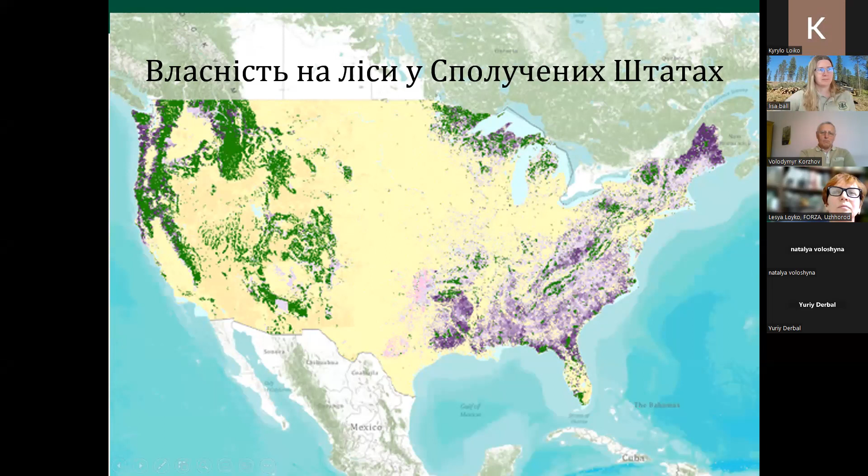So the Pacific Northwest is a temperate rainforest, getting a lot of moisture coming off the Pacific Ocean. And so there can be 150 to 400 centimeters of rain annually. It has cold, wet winters. So a lot of the rain turns to snow at the higher elevations, around 1,000 meters. So below that is rain and above that is snow, followed by warm, dry summers. It's volcanic in origin, and a lot of our mountains are still considered active volcanoes, although the last major eruption was 40 years ago. And it's mostly coniferous trees, Douglas fir, cedars, and hemlocks.

The east, because it's farther inland, is a little bit drier. Depending on where you are, ranging from 25 to 250 centimeters of rainfall, has a lot colder winters, in part because it's higher elevation, in part because it's away from the ocean. It's also volcanic in nature. It has a little bit more mixed species, pines and hardwoods.

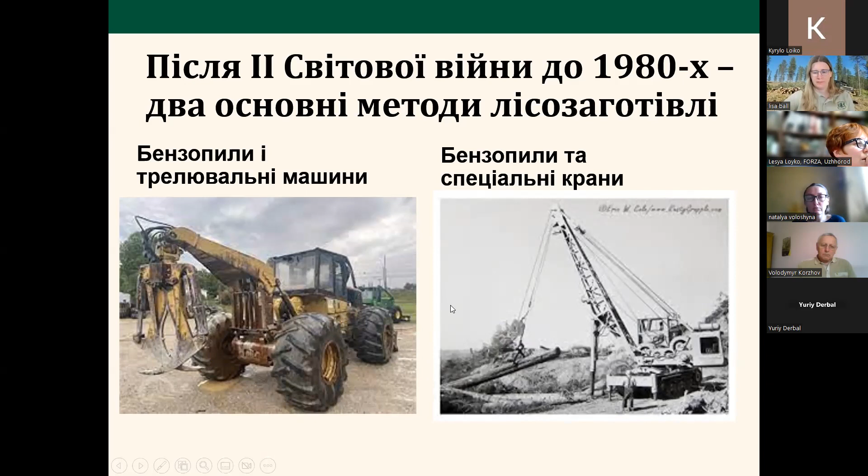In the 1980s, there was a switch to doing less and less cutting using chainsaws, and on slopes where it would allow, about under 40%, felling turned over to feller bunchers. This machine will go out and it can cut a tree, hold it, cut another tree, and they can hold up to 10 trees while still collecting and cutting more. So we call this a feller buncher. It then places bunches of trees that makes skidding very efficient.

So it's more efficient, and it's also a lot safer. Logging, at least in the US, is always the number 1 or number 2 most dangerous job, and cutting trees with chainsaws is definitely one of the more hazardous jobs. Being able to put the worker inside of the machine versus cutting with a chainsaw improves worker safety significantly, as well as increasing productivity and reducing costs.

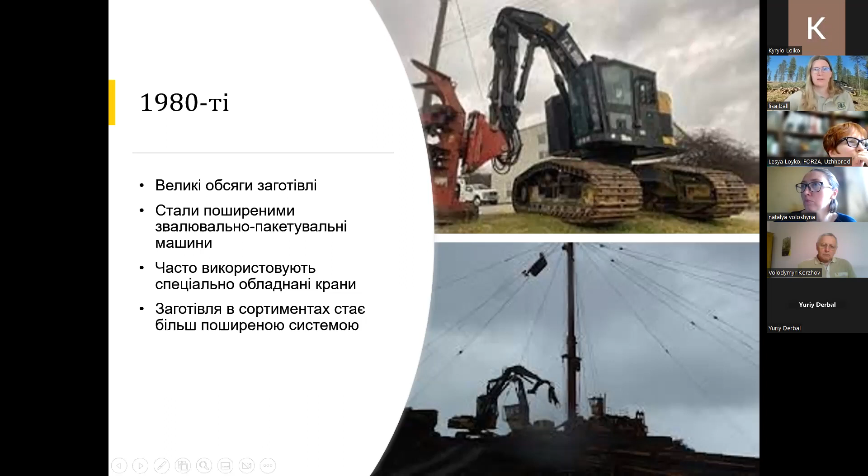And then we come into the 90s. Up through the 80s, a lot of the harvest was still old growth. But in the 90s, there was a big public pushback, and a lot of concerns were raised about logging practices, especially around the cutting of old growth and what that means for wildlife that depends on the old growth forests, fish, and the whole ecosystem of that old growth forest.

So a lot of new regulations came into effect, and you see there was a significant drop in our harvest volumes between 1990 and 2000, where it has basically plateaued since then. Because volumes dropped so much and we shifted away from high value old growth to younger stands, the loggers needed to really be as efficient as possible in their logging in order to stay in business.

And so harvests stopped in areas, especially in the east, with low rainfall and slow tree growth. Those areas stopped being harvested because it was too costly to get to them. And so yarders with the tower system went away in a lot of areas, because the trees weren't economical enough to justify that logging system. And now in those areas, there are no yarders left.

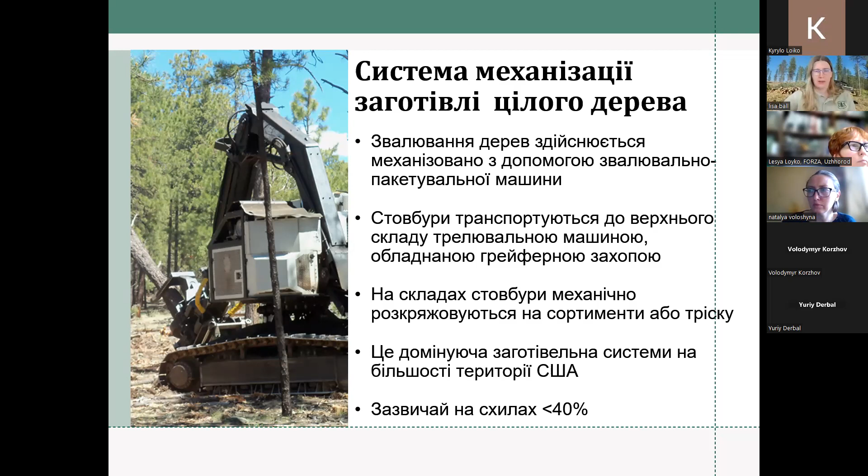With this system, all the tops and limbs are left at the landing, which has its good and bad. If you are worried about wildfire, you don't want that slash out in the woods causing wildfire concerns. But it also means you have a large pile of slash at the landing that you need to manage. And it does remove some of those nutrients from the soils.

The mechanical whole tree system is very cost efficient. It's also very safe because your loggers are in equipment cabs the whole time. You have a person in the feller buncher and one in the skidder, and there are a lot of regulations that go into how those cabs are designed in terms of safety, if something falls on them or if they were to roll over. As I mentioned, all of the slash ends up at the road.

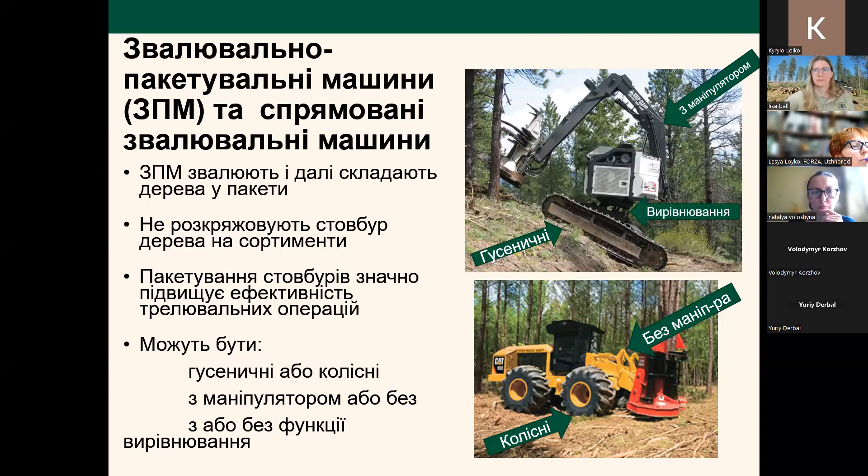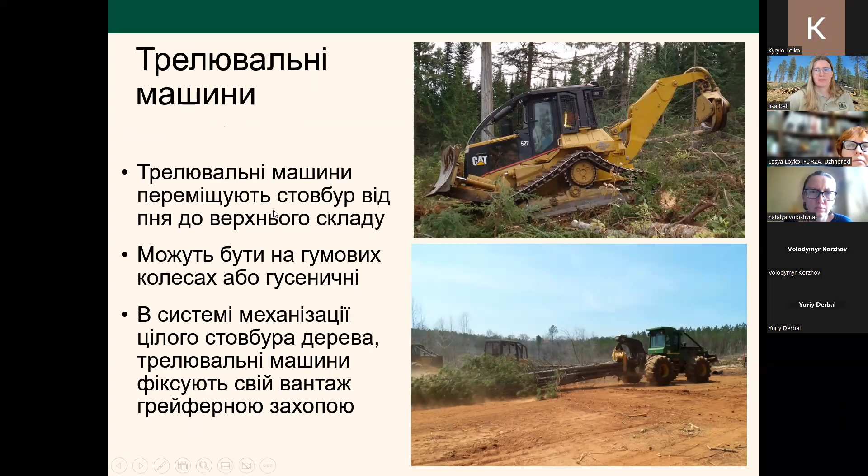So the mechanical whole tree system is probably the cheapest logging system that we have, and it's the most common, in part for that reason. But there are also cut-to-length systems out there.

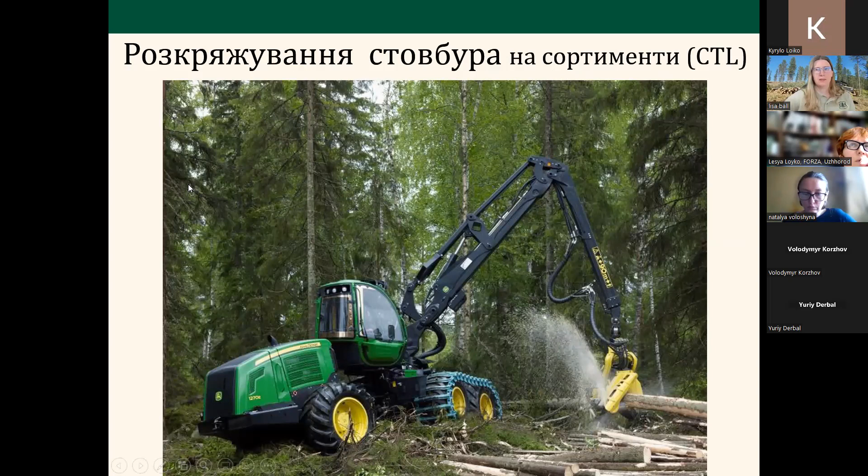When it does that, it creates slash. This slash is good because the harvester will walk on that slash. This reduces the soil impacts, specifically soil compaction and runoff after operations have concluded. The forwarder will then go and grab these logs and carry them back to the road, to the landing.

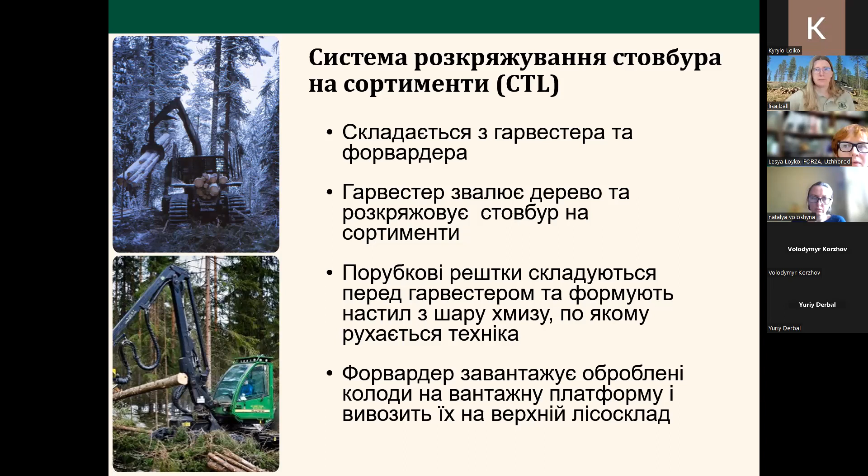That slash mat that the harvester creates reduces soil compaction, especially in wet soils. It causes very little residual stand damage, so it doesn't hurt the trees that are left, and it works very well when you have a lot of trees left.

This is a stand after the harvester has gone through, and there's still a lot of trees left in the stand that needed to be protected.

Harvesters can also be tracked or wheeled. As I mentioned, it cuts the trees and delimbs them. These can generally go up to 40 or 50% slope, although some newer models are specifically designed to go up to 75% with a winched tether, as we'll talk about later. You get fully processed and sorted logs out in the woods to take to the landing.

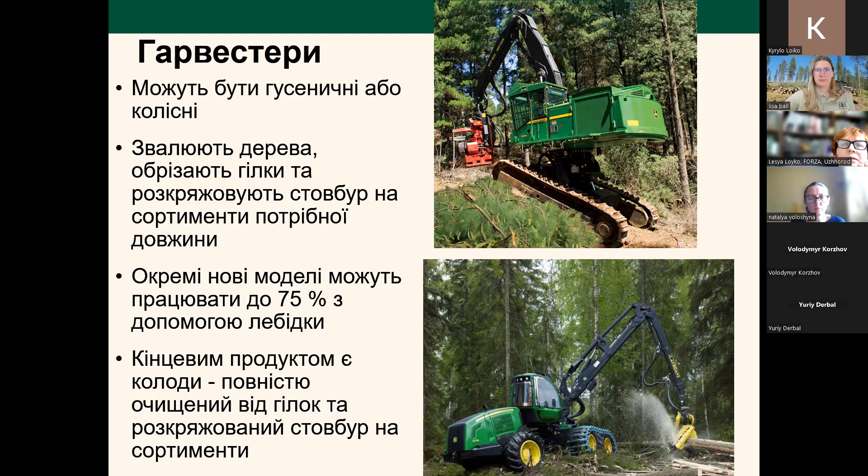Here's an example of one of the machines working on some steep ground near where I live.

The forwarder carries logs free and clear of the ground. They're not dragged like you see with a skidder. The machine has its own grapple and will load itself with the logs.

It does only handle shorter logs, so 5 to 8 meter long logs, compared to the skidder, which is bringing out full trees that might be 30 meters or more in length.

But they do stay on that same slash mat created by the harvester, which again reduces soil impacts. And because you have logs, not trees, cut at the road, they don't require much of a landing at all. They can just drive up and place the logs next to the road to be hauled away.

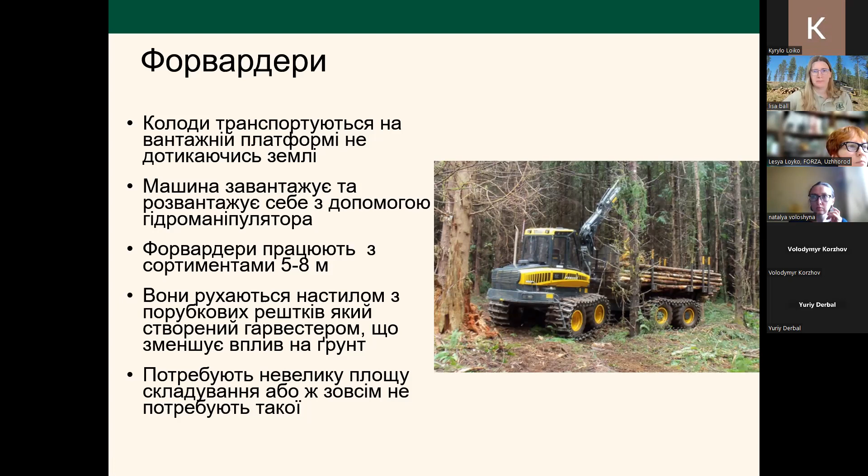So when we're designing a cut to length system, one of the main things is these machines, especially the forwarders, do not go on a side very well. They will tend to roll, so they need to go straight up and down the hill.

These forwarders can also carry a lot more than your skidders, and so we make fewer passes going back and forth, which also helps to reduce soil impacts.

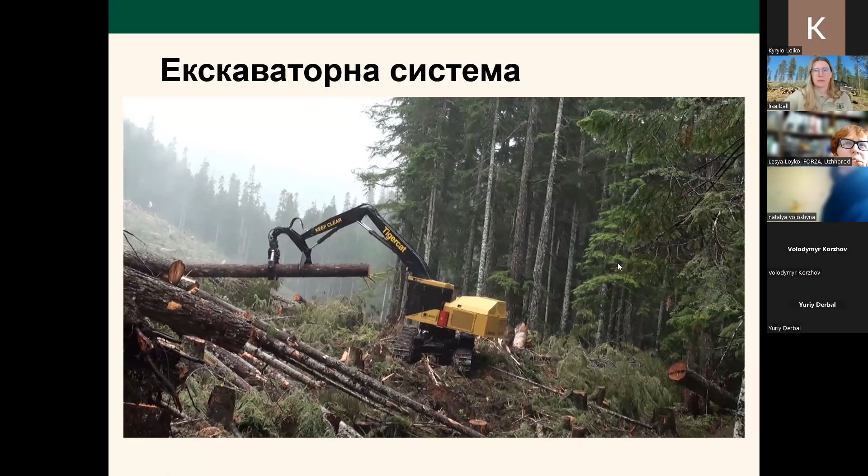The last ground-based system I'm going to talk about is what we call the shovel system. In this system, the tree has been cut and the machine picks up a log and moves it closer to the road. It does that for all the logs it can reach. It moves forward a little bit and does the same thing, just picking up logs and placing them closer to the landing. They'll do that several times until they reach the road.

Sometimes they have a saw in this head, so they can both cut the tree and also move it closer to the road for operations.

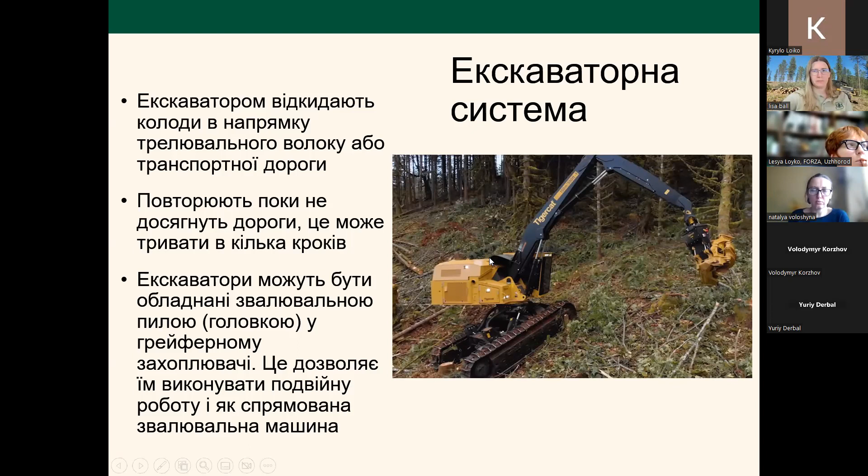This system is often used when you have wet sites, because you really don't want a machine going back and forth. It's only making one pass, moving very slowly and lifting the logs, which causes probably the least amount of soil disturbance.

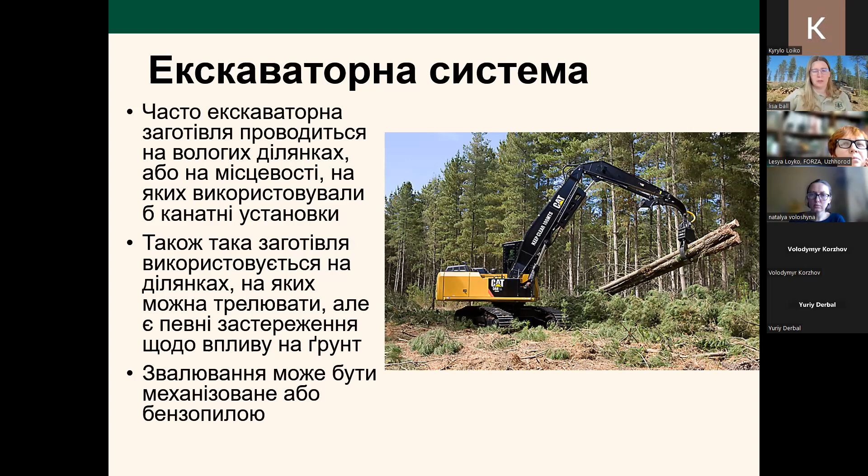It also works well for relatively short distances. If you have a road and a stream and 100 to 150 meters you want to treat on some steeper slopes, it's a good system for that. The soil impacts are reduced because the machine only makes that one pass, about every 15 meters.

It's a tool for clear cuts because, as you can see, it's picking up the logs and moving them. If you have existing trees, they tend to get hit a lot, which causes damage. It also slows down the shovel operation, so your productivity goes down.

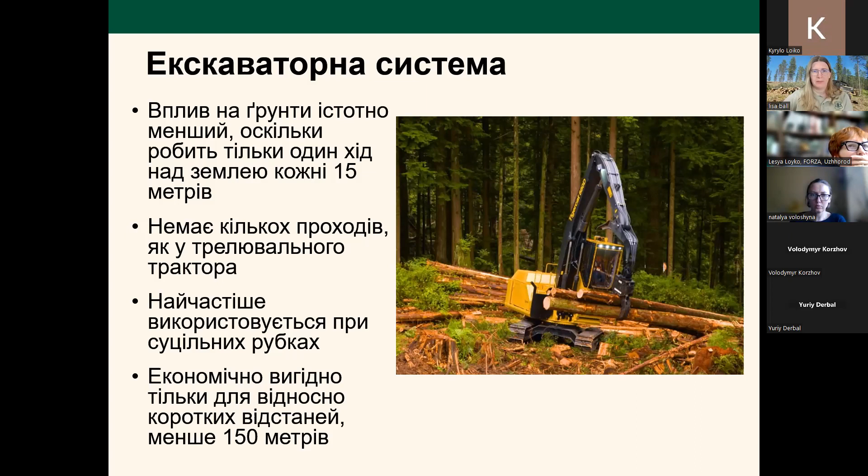It is only viable for short distances, about 150 meters. Technically you can go farther, but it's going to cost more and slow down the operation. But compared to cable yarding, it is quite cost effective, especially for those shorter distances.

Again, it is mostly a clear cut operation, although it can be used if you have a few residual trees left in your unit. This is also sometimes used in swamps, where they will go out into the swamp and move the logs over to basically a road made of trees that the skidder will operate on.

So that was what I had for ground-based systems. That's a good stopping point if anyone has any questions on that topic area.

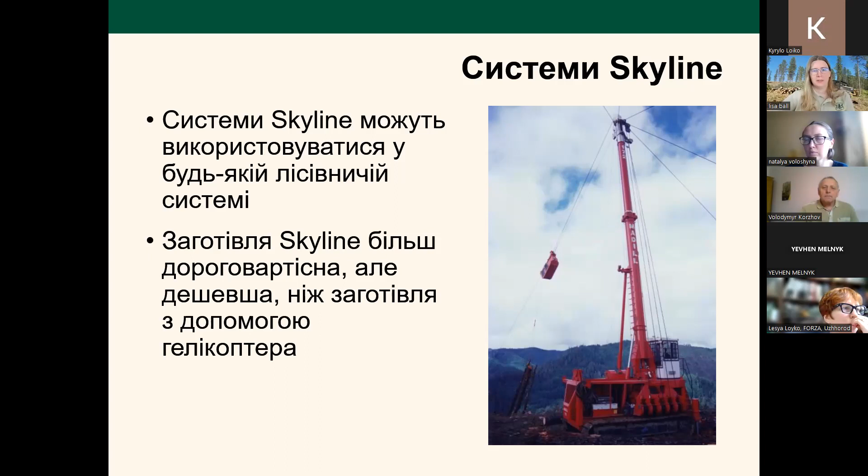And so here's a diagram. You have your yarder on the road. Most of them need to have stumps to help hold the tower up. You have lines that go out and tie off to trees out in the woods. And you have another smaller machine that goes out, will grab the logs, and then a rope is used to pull it back to the road.

The multi-span option is basically where you use a tree in the middle of the unit to keep this line up in the air so that you can reach further with this system. The topography, or how the land is shaped, really affects how far you can reach in grabbing logs.

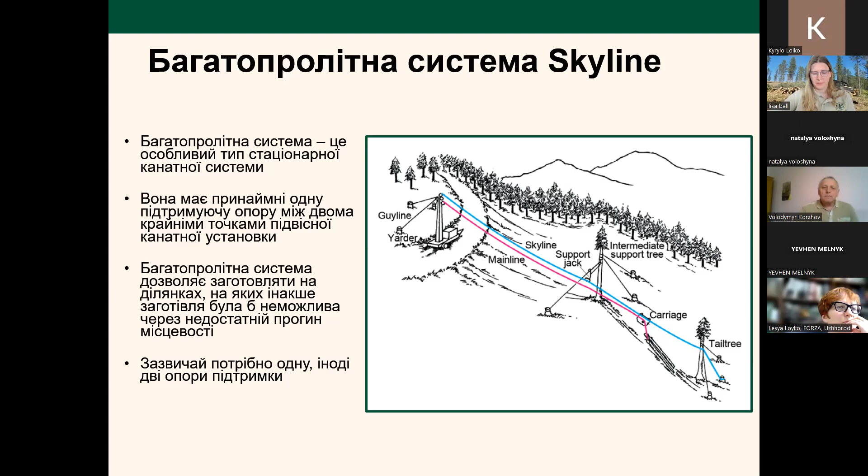So yarders is the machine that we use that sits at the landing at the road. In the past, they were purpose-built yarders. During the 80s, a lot of these were made. Sometimes they can move a little bit, which changes where they're most efficient, if they're standing or if they can rotate to pile the logs, say in the road like this. But very, very few of these are built anymore expressly just for the purpose of logging.

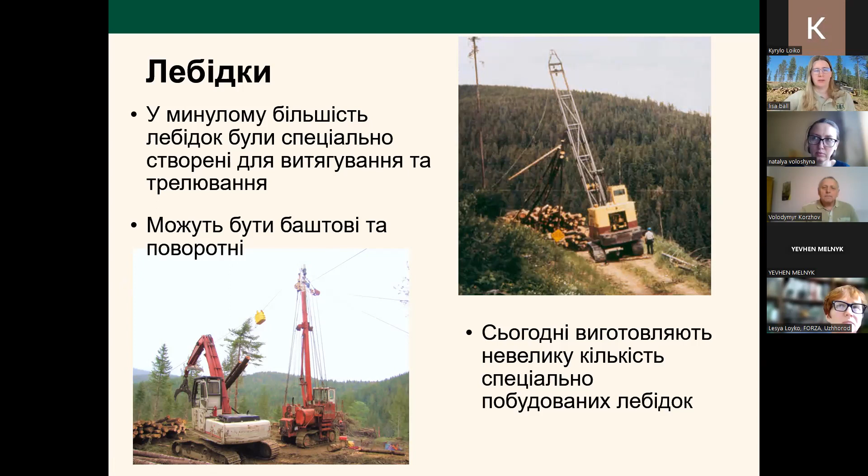Now, most of the machines we use as yarders were actually some other type of machine that loggers make modifications to so that they can act as a yarder. So we have a loader and we have an excaliner that are now yarders that started as a different piece of machine originally.

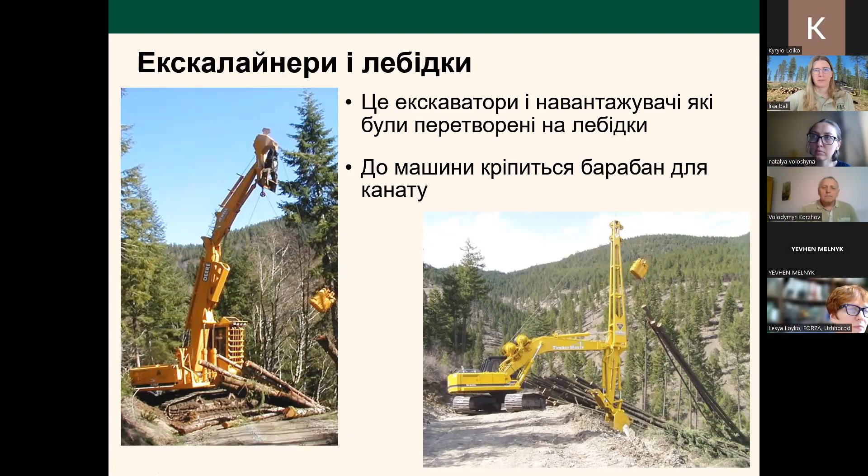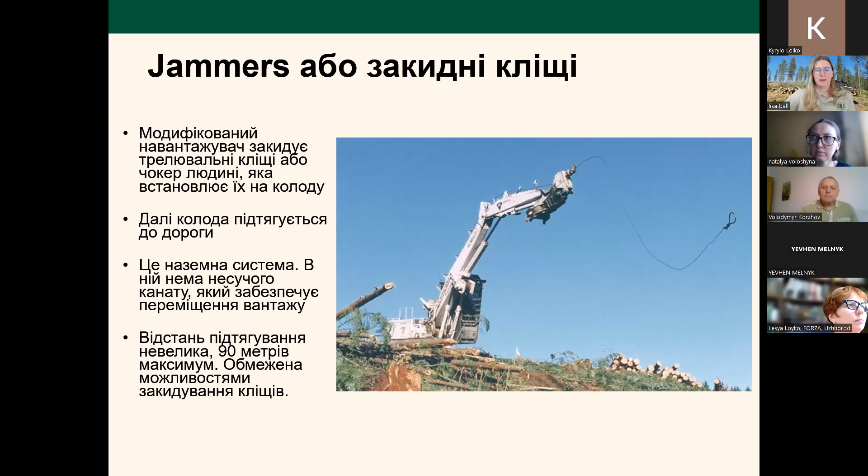Another method for getting the logs out for shorter areas of, say, about 90 meters is jammers, also known as tong throwing. And so you have the tongs here attached to a rope, and this machine will start swinging around and then release the brake, and the tongs go flying out into the woods. Someone in the woods will put those tongs around a log, and then it will be dragged back to the road.

As you see here, this will throw them out into the woods, and you have a very brave person out in the woods watching these very heavy tongs come flying towards them. They will put them on the log and then they will be dragged back. So those are our cable systems that are used in the US predominantly.

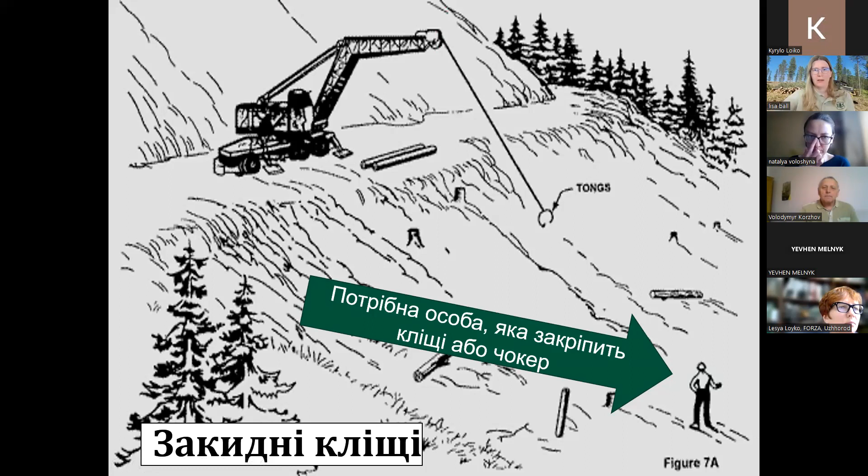Because you can't overload the helicopter or it will crash, they need to be very careful about how much weight they put on that helicopter. Flying tops and limbs is very expensive and they don't want to do that. It costs about 4 times as much as your ground-based systems and about twice as much as a cable system. These machines can cost up to $8,000 US per hour to operate, and it is a very expensive system.

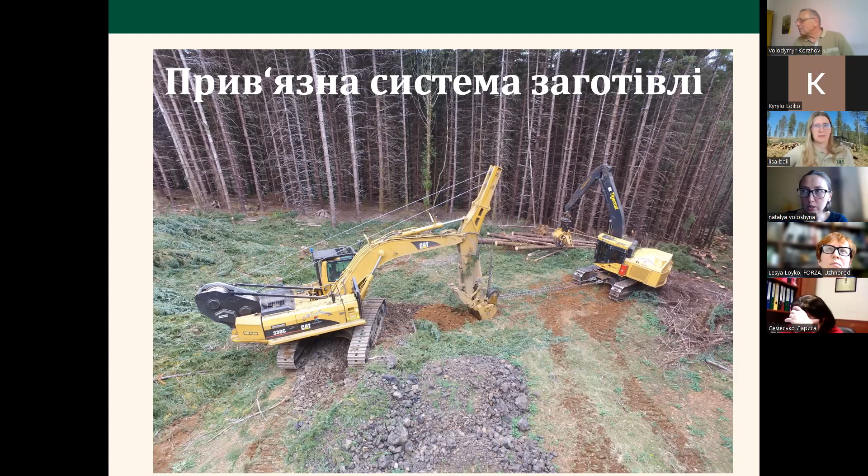Iryna Shpakivska asked this question: if there are large areas of deadfall territories, what methods are used then? And I see Volodymyr's hand. I'm not sure I understood the question. Can you repeat that? The question was, if you have large areas of windfalls, what approach, what machinery do you use? What systems do you use?

For that, if it's less than 40%, we found the cut to length system works well because the machine can pick up the logs and get the branches and pile them easily and kind of sort through them. If it's on the steeper ground, if we can reach it with a cable system, we will. You know, last resort would be helicopter.

Let me just summarize. It depends not so much on the area of this windfall, but rather on the landscape, on other conditions, right? On the slope, the tilt, and so on and so forth. Okay, thank you. We have another question.

If I may, I read this question first, Volodymyr, and this is about the part of the presentation that you presented previously and the one that goes next, I believe, because the question is, where do you train forestry machinery operators, and if they need special permits to work with these mechanisms, including cable systems? Where are they trained and if they need permits?

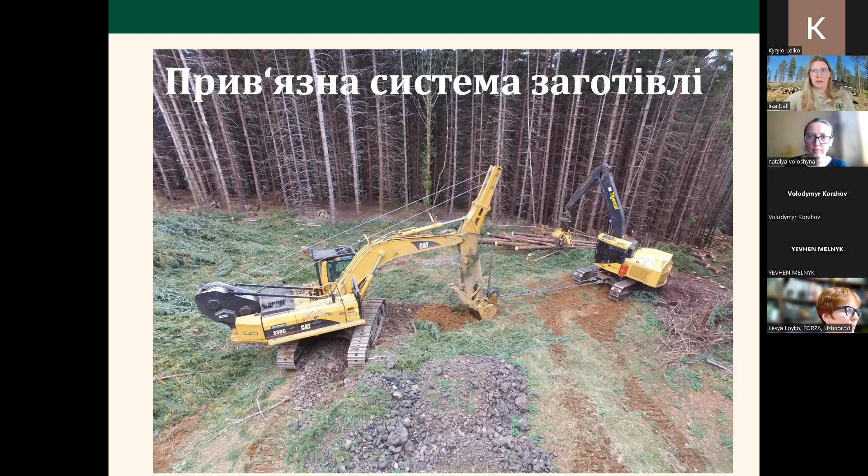And we call it tethered logging, or sometimes winch assist. Volodymyr Leonidovych, please mute your microphone. That's the request. Mute.

Okay. So with tethered logging, we're using ground-based machines that normally wouldn't go above a 40% slope onto steeper ground that would normally be cable logged. And so you have your machine and it's out operating on 70 or even 80% slopes.

Sometimes the loggers do it just for cutting the trees and still cable log, or sometimes they will fell the trees and also remove them with this tethered system. And so the harvesters, feller bunchers, directional fellers, forwarders, shovels, skidders, all of these have been used tethered in the last few years and are ongoing.

So this tethered logging, you're basically using a winch to help this machine get up and down the slope. Because it's on a steeper slope, it wouldn't be able to operate on this area, but there'll be a winch to help it get up and down this slope.

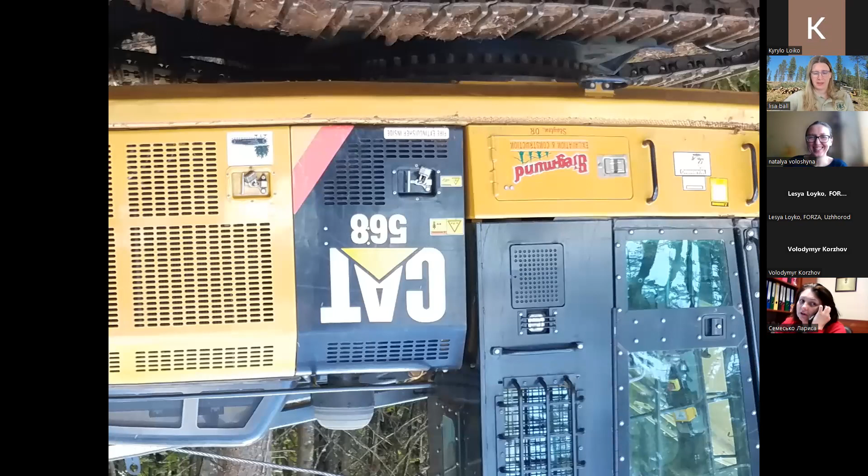You should remove one slide because it completely covers the picture with the first method. Maybe if you just delete the picture. Yeah, because that's, I guess, the picture that I had difficulties with, and I inserted it today. So maybe it covered the slide. That's okay. I'm sorry for that. No problem.

So the other method is where you have two machines. You have the winch on a machine that will stay at the road, and then you have the machine that will go out into the woods. We call this one the working machine because it's doing all the work, and we call this one the assisting machine, the one with the winch on it. Because the winch is on this machine that stays stationary, this line does move when this machine goes out into the woods.

So one of the reasons, as I mentioned, this is starting to really gain a lot of use is that it improves safety, putting them into equipment cabs that are approved by our Occupational Safety and Health Administration. Because you don't have people out cutting with chainsaws or working under the yarder, and they are instead in cabs, it is a lot safer for them.

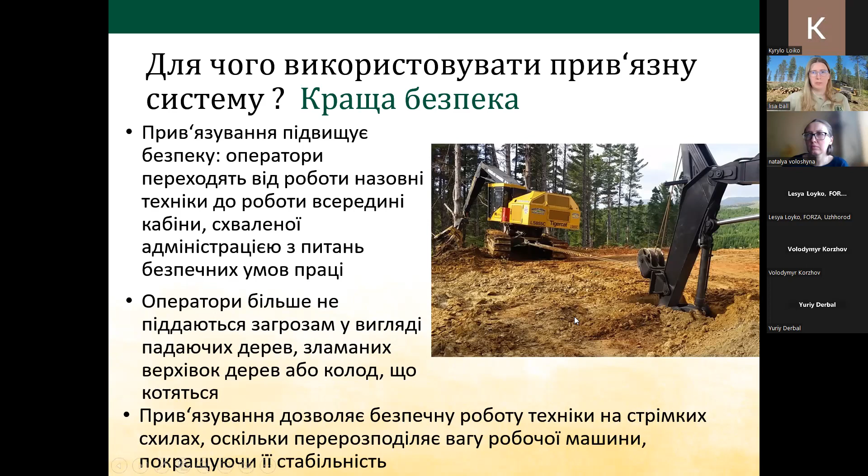And these systems have reduced soil impacts as compared to putting the same machines on a slope untethered. And so efficiency goes up because the machines are doing the work instead of someone on the ground. So you can see here, we have forwarders, shovels, even skidders can be used with this tethered system. And so it allows for fully mechanical yarding.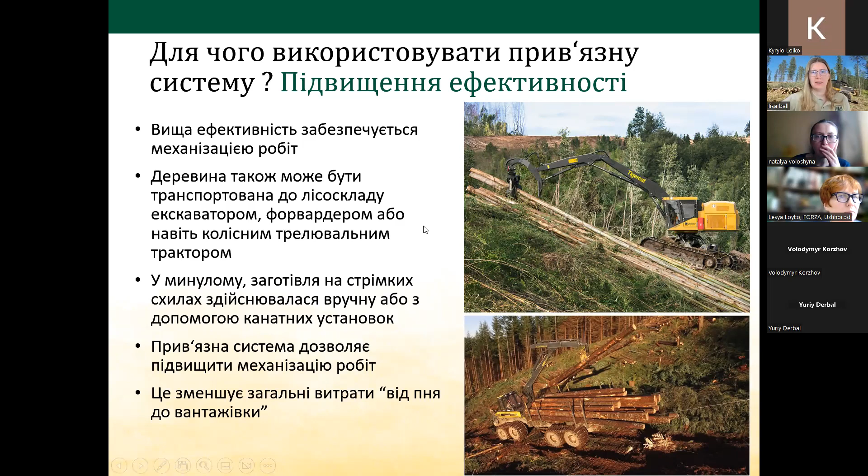So a question that people ask when they first see this tends to be, how steep can they go? How steep of a slope can you put these machines on? A better question is actually to ask, how steep should they go? This is not one of our operations. This is a picture taken somewhere in Asia, I believe. But this is steeper than we would want to see on our logging sites.

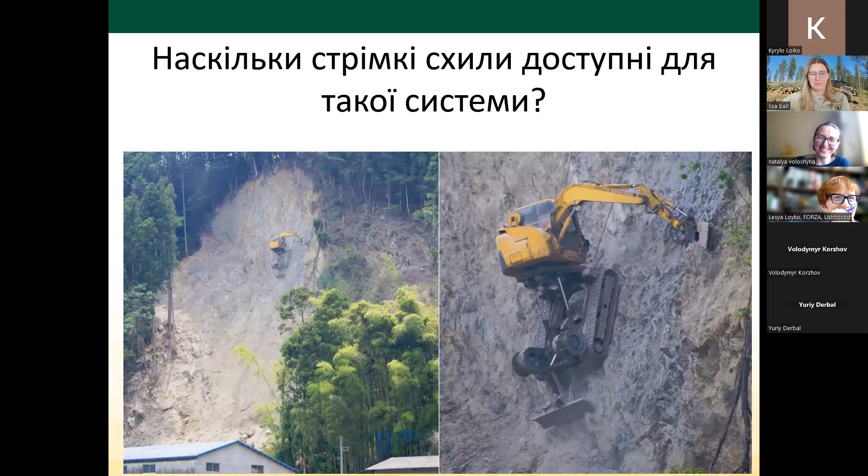And how steep they should go, a lot of that's going to depend on soil impacts. So there's slope. It's also going to depend on your soil type, the trees and bushes and plants that you have left on site, the skill of the person working the machine, the weather and ground conditions, and then the access for the machines and the anchors, such as trees, to be able to anchor these machines to.

So equipment on slopes over 40% causes concerns with soil due to displacement and rutting. That's usually caused by the machines spinning their wheels. They don't go anywhere and they can dig deeper and cause soil impacts.

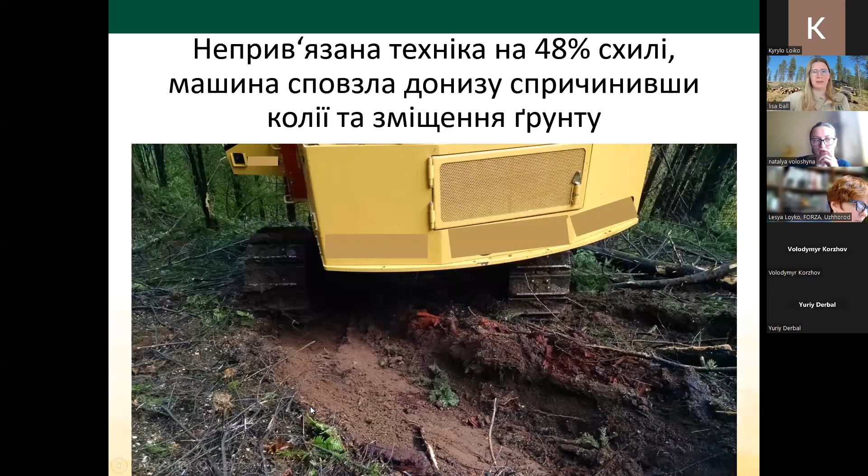So this is what happens when you go off the road with a piece of machinery that is not tethered, and it starts to slide and cause soil problems, which then become worse when you try to get back up the hill onto the road. This is why we don't take untethered equipment onto these steeper slopes, because you start getting soil impacts like this.

But when you tether, it actually changes the weight and how that happens on the equipment. If they are not tethered, all of the weight ends up focused on the downhill part of the machine, in this circumstance on the tracks. This is where that soil damage will occur, because all the weight is right here. When you add a tether in on this line, the weight is more evenly put onto the ground. It gives better traction, and you get reduced soil impacts because of that.

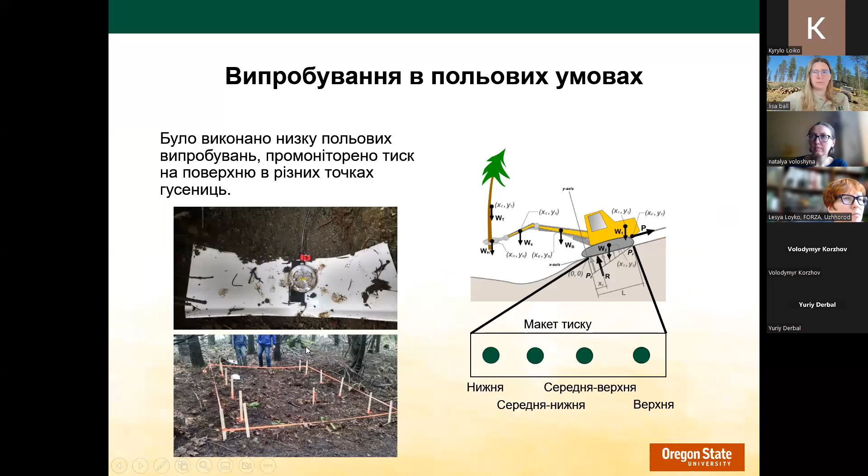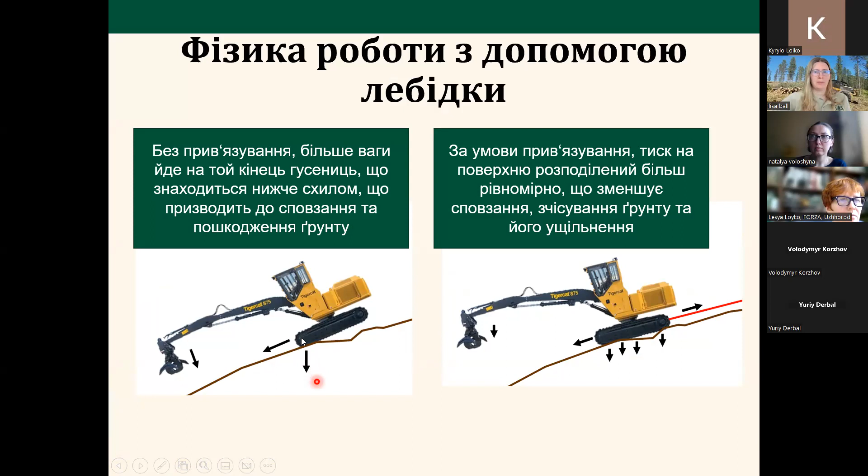When we tether, there's a little bit of increase on the top of that track, but as you can see, the weight on the bottom part of that track is greatly reduced. So instead of all the weight being here and none here, it's more evenly distributed. That allows for better traction, allows the machine to operate, causing less soil damage.

So on steep ground, more of that weight is on the downhill side, causing soil damage. When we tether, it reduces those soil impacts because the whole length of the track is in contact with the ground.

Do you have questions about the physics of how that tethering works and how it helps to reduce soil impacts?

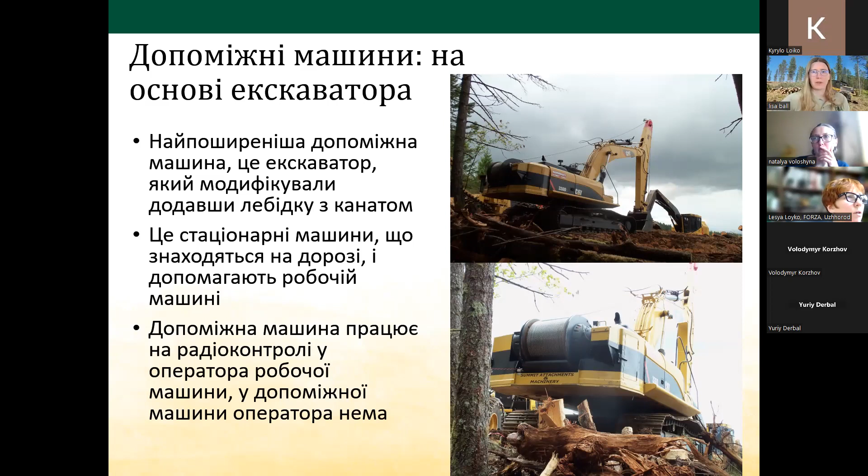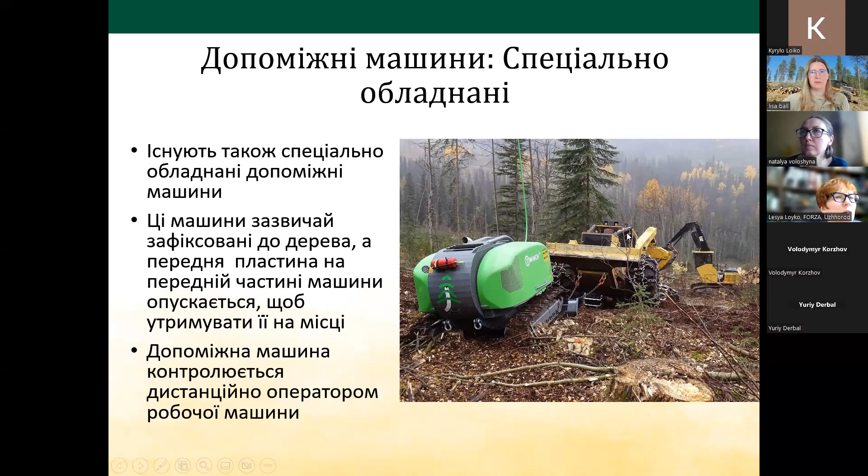The most common machine that we're seeing being used tethered is the directional feller and feller buncher. One reason is that it replaces a lot of people with chainsaws, which is one of the more dangerous jobs. It's also one of the jobs that loggers are having a harder time finding people with those skills who want to work in that job, especially because it is dangerous. This also allows for the logs to be put in piles, which, if they're cable logged, means you can cable log more effectively, or you can also then use another method, such as skidders or shovel logging. So this is the most common tethered machine we're seeing at present.

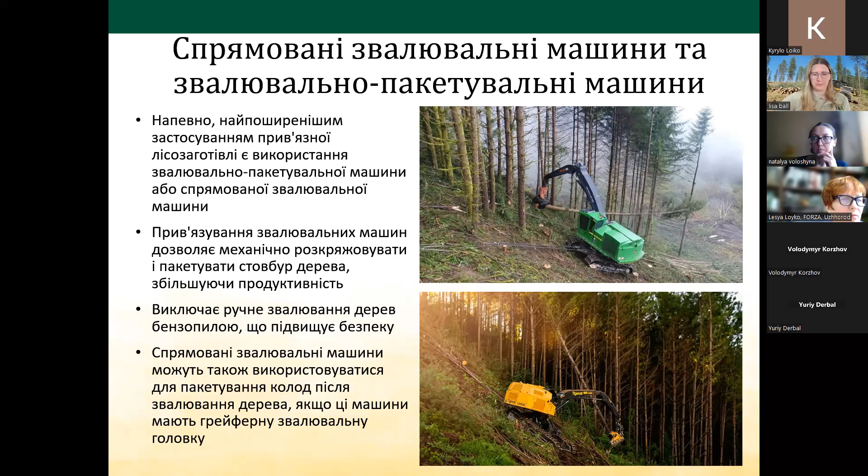And I have a video to show of a tethered directional feller for you.

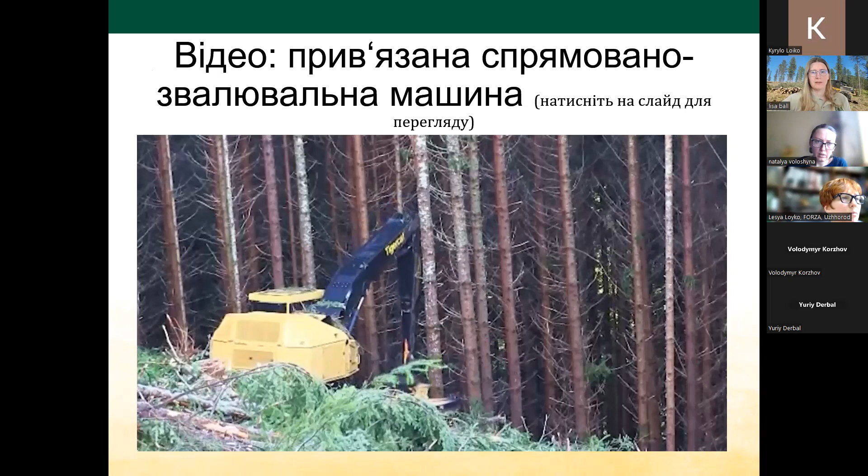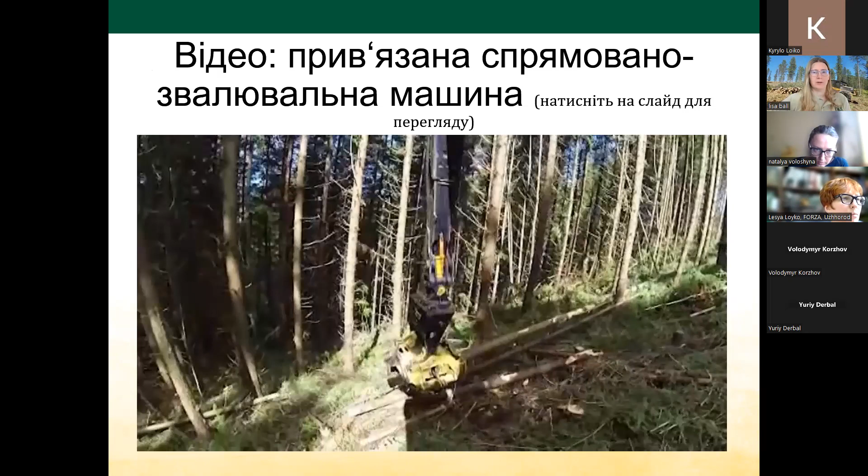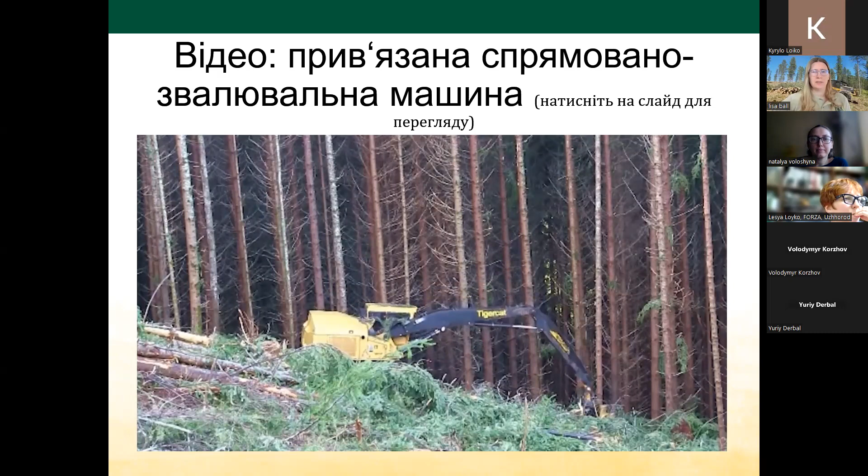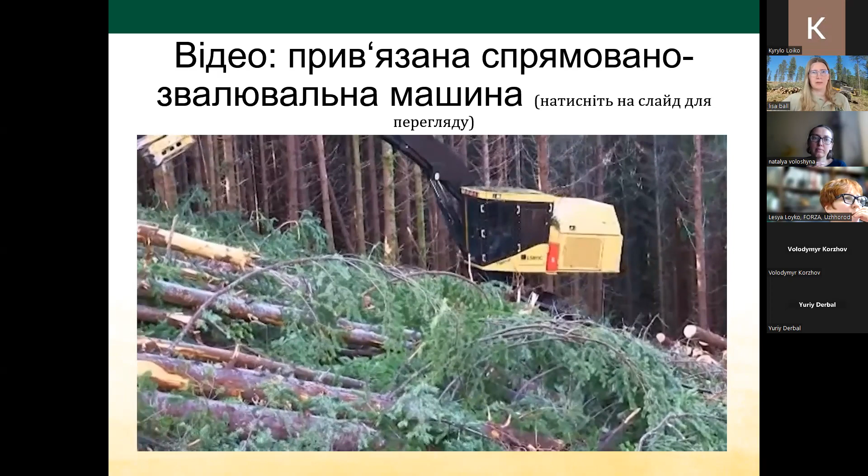So this machine is designed to just cut one tree at a time and then place it in a pile for another machine to take up to the road. These can cut trees up to not quite a meter in diameter, probably just under a meter—that's the size of tree they can cut. There's the winch line that's on that machine.

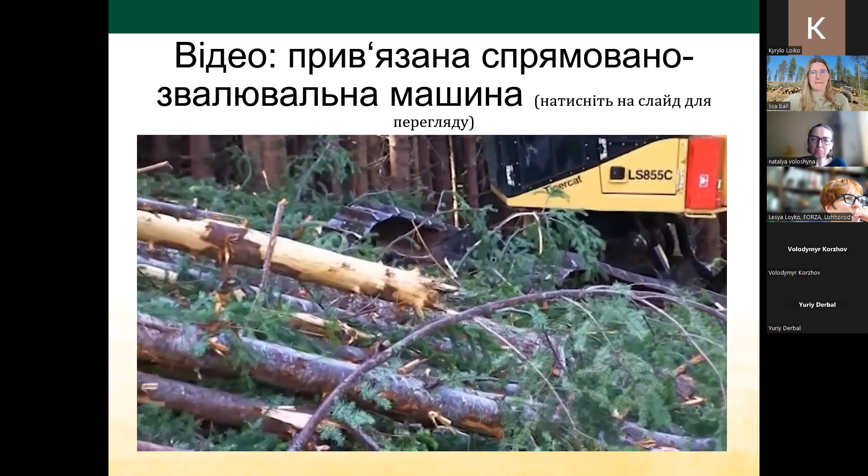So shovels—these are the machines that move the cut logs by picking them up and moving them closer to your road. The nice thing is your directional feller that we just saw can also be used as a shovel. So you might have a machine that goes down and cuts all the trees as it goes, and then it ends up moving all the trees back to the road as it works its way back up the hill.

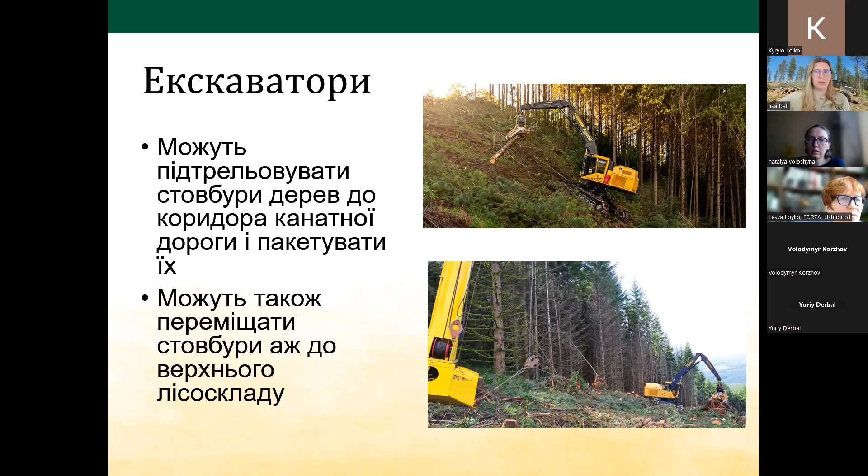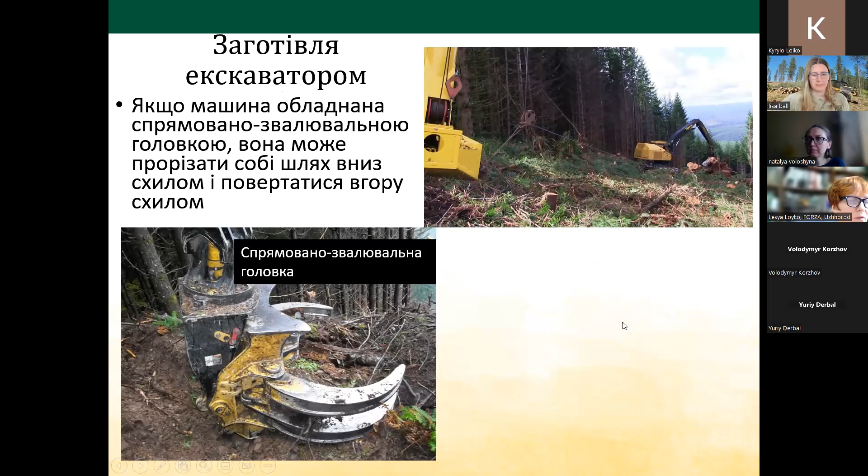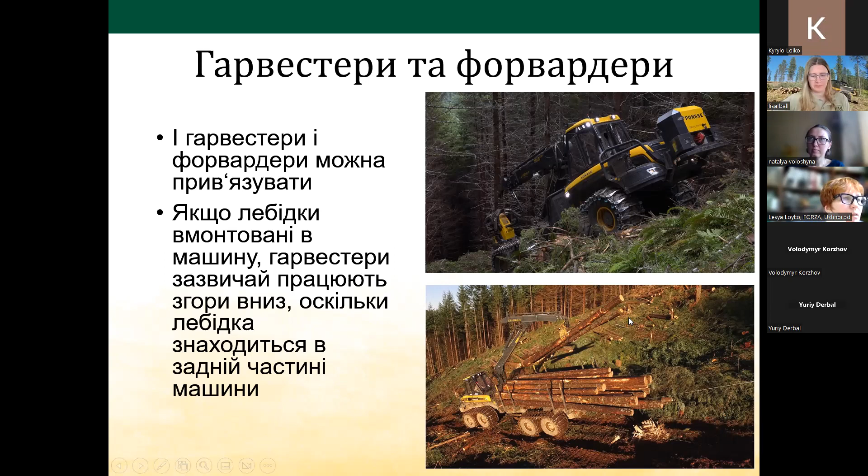So harvesters and forwarders, actually this is where the technology started, was in New Zealand. Both of them can be tethered. If the winches are on the machines like you see here, they pretty much always start from the top and work their way down. The forwarder will always have the cab on the downhill side because there's a metal wall so the logs rest on it. Otherwise, facing the other way, all the logs would slide off. Harvesters and forwarders work great as a tethered cut-to-length operation. And if they're the Ponsses, they don't need another machine. It's just one machine to cut, one machine to forward, and they tie off to two stumps.

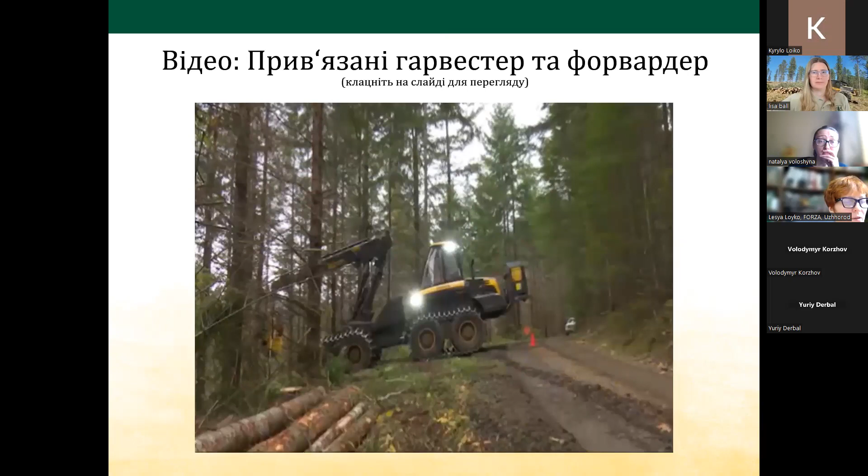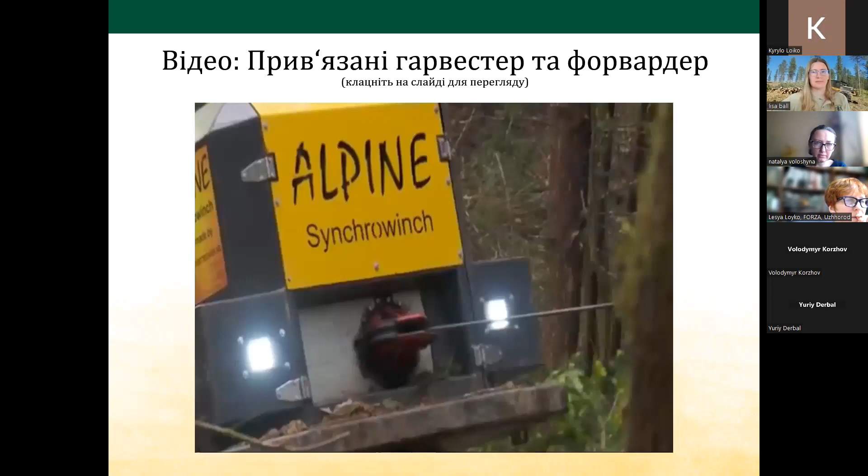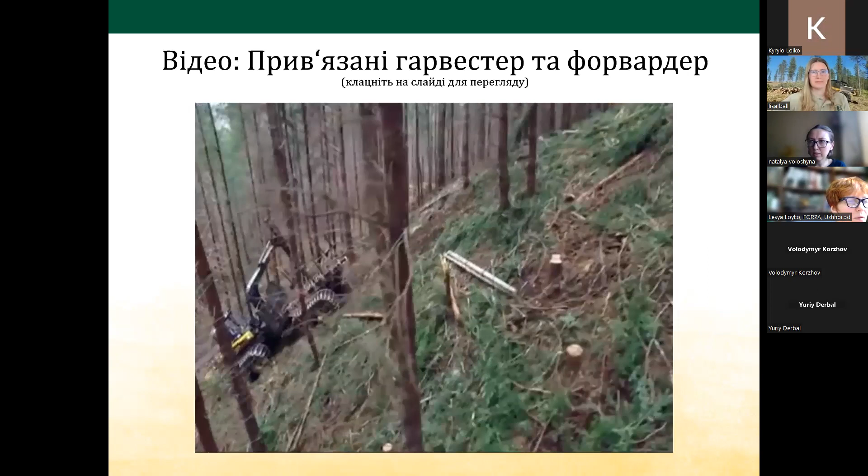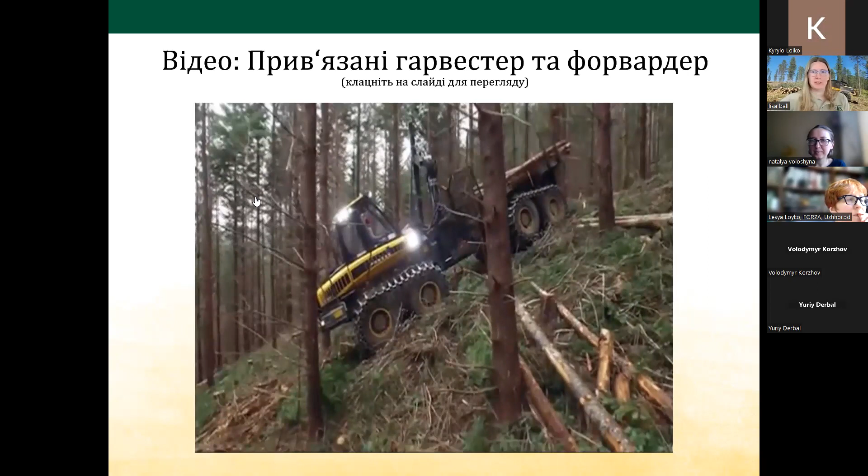And here's another video of a cut-to-length operation for you. Now it's a little bit of a long video, but I find it really helps people get a visual and understand the system better with the videos.

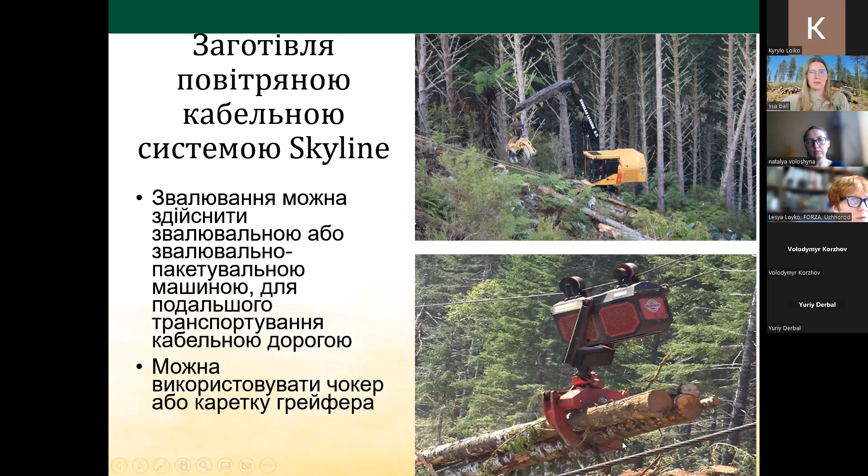You can still cable yard in some areas if you don't want to put a skidder or a forwarder on the landscape, but you still want increased efficiency and safety. So you send a feller buncher or directional feller to cut down the trees, then place all the cut trees underneath the cable. Instead of wire ropes and people needing to put those wire ropes on the logs to get them to come out, you can put a grapple down - there are cameras mounted on this machine - and it will go down and grab bunches of logs at once. So you can still have increased safety and efficiency while using a cable system.

So some things to think about that are unique to tethered operations: there will need to be a trail every 15 meters because the boom on the machines can only reach out about 7-8 meters on either side. Those trails need to run up and down the hill - you do not want to be on a side slope because you could roll over, so you want to go straight up and down. Although with these systems, you can kind of go down a hill and then put in a block and turn and go down the side of the hill, as long as you're still going up and down and not risking rolling over.

So a lot of our forests in the Forest Service are trying to write our environmental documents to allow for this type of operation, but not require it, because it's still not something that even half of our operators have. It's definitely growing in popularity, but it's not something everyone has. So we're not requiring this, but we are trying to allow for it to happen.